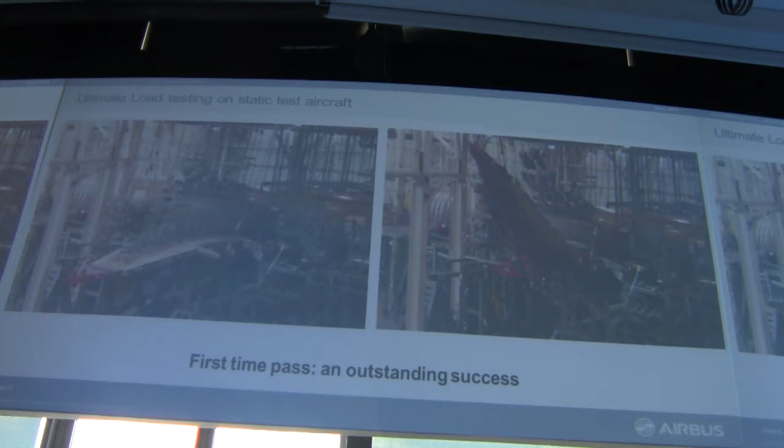We set ourselves the target of demonstrating 1.25 limit loads at the time. We then continued on a very successful trend until the end of last year, when we finally passed the ultimate load test with ease. You can see here the impressive results and deflection that we had on the wing.

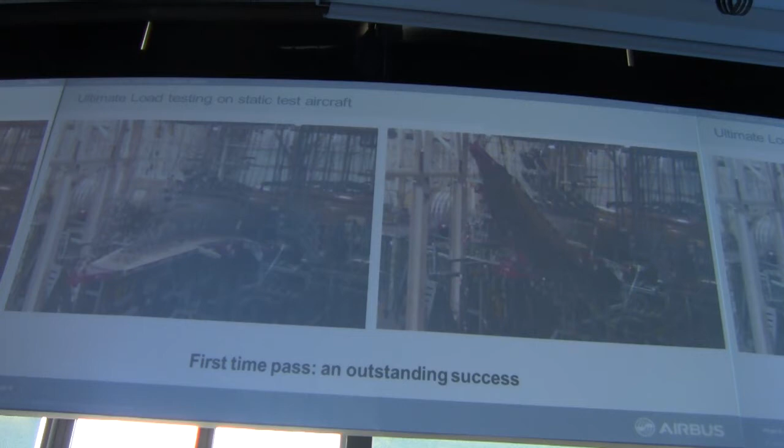That was a very important achievement, because for sure this did a lot to achieve the maturity of the design from a structural point of view. There is another very important stream of actions to certify and qualify the structure for operations.

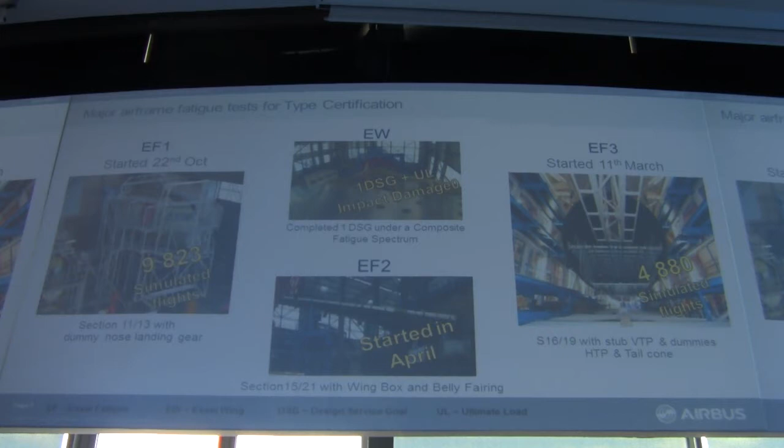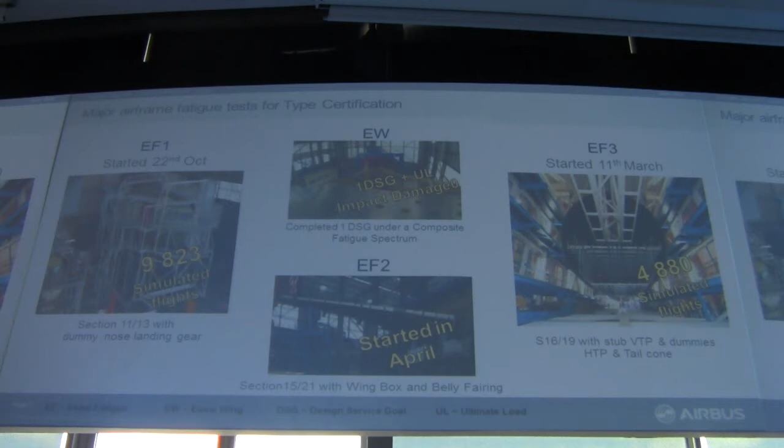That's the fatigue test campaign. We are well into this fatigue test campaign already. We have four specimens participating in it.

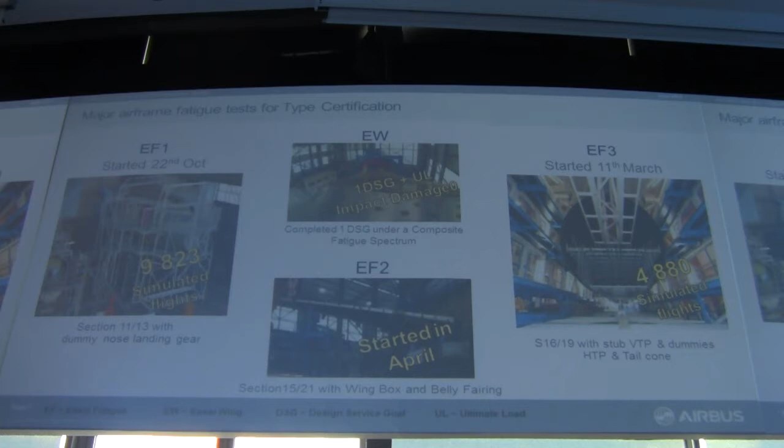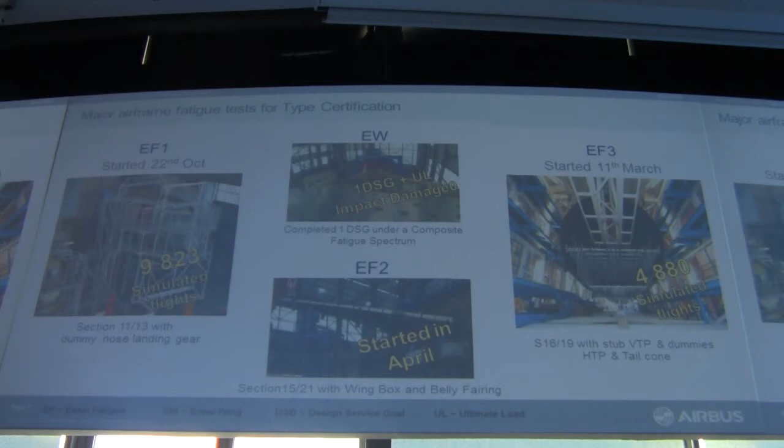In fact, we have cut the aircraft into three parts: the front, the aft, and the center fuselage, including the wings, plus an additional wing, which is on its own but there to recognize that this aircraft is made of composite. The wing has composite and metallic parts, and the two need to be exposed to different testing cycles, which is why we cut this campaign for the center fuselage in two—one to qualify the wing first under a composite fatigue spectrum just for the composite itself.

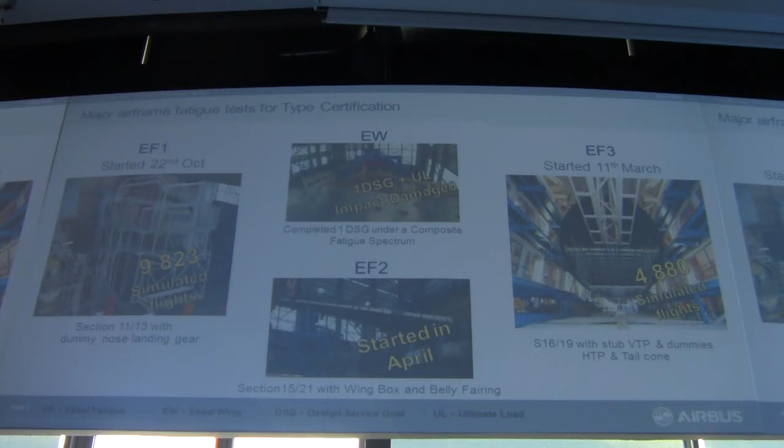And when it was done to a certain extent, and we had demonstrated that we could go to one design service goal and then pass the ultimate load testing of the wing itself, we could start the campaign we call EF2, which is center of fuselage plus wing, this time with a different type of fatigue cycles, which will clear the way towards several design service goals.

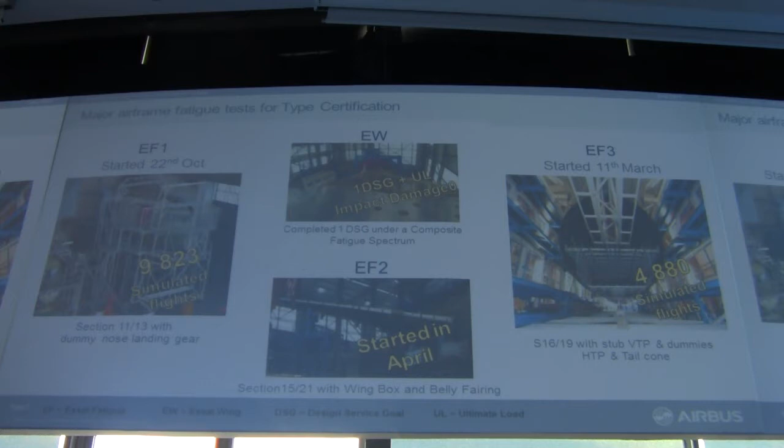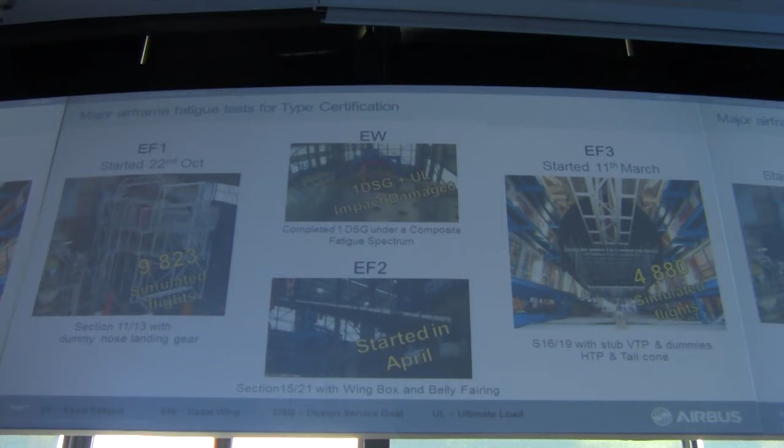So now, in terms of achieving the minimum required for certification, we have already passed this milestone for EF1 and EF3 - the front and back end of the aircraft. Now we are finishing the center of fuselage the same journey, and in the coming weeks we will have achieved enough evidence to start operations. Nevertheless, this testing will continue in 2015 and perhaps even into 2016. It's a long journey where we will expose this structure to many cycles representing several design service goals. So that's on the structure side, and so far so good, I would say.

Now, flight test itself - 5 aircraft will be flying soon, and certainly MSN5 will be the most visible one in the last phase of the test campaign. I said 1900 hours projection, and what we need for certification is around 2,500 to 2,600. We'll see the precise numbers, but with a fleet of 5 aircraft, we will have no real difficulty accumulating the flight hours and tests we need for certification. And actually, certification is not just aircraft flying; it's also the results of tests and a lot of certification documents that we need to deliver.

To our authorities, and we need their blessing before we can get to the type certificate. So this is going quite well; we have a clear path to a certified aircraft, and certainly we expect that we will deliver our share of the work before the end of the summer, and then it will be the final discussions with EASA and FAA, following closely what they are doing, requesting, and approving. So that's the plan.

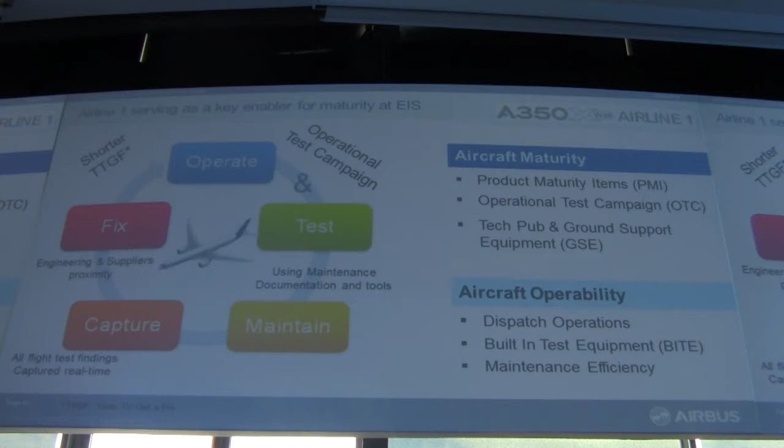So this is the setup. The concept is simple: operate and test the aircraft like if we were, as much as possible, doing still flight tests, but as much as possible in an operational environment. Use the maintenance systems and the support systems that our customers would have. Capture the findings as soon as possible and fix the issues as quickly as possible, trying to reduce as much as we can the time to get the fixes. So that's two aspects: aircraft maturity, how to accelerate it, and how do we feel about operability when time comes. What is our view? What do we need to anticipate with the customer? How do we need to prepare him for this journey?

So that's in a bit more detail for aircraft maturity. Since the beginning of the program, we were chasing all the findings from other programs, from our environment, particularly for Airbus aircraft, trying to find what was relevant to us, what we needed to do with the design or with the testing to demonstrate that the issues other programs had would not be likely to happen in the A350.

So that has been in place from the beginning, but now it's about the product maturity items that come directly from flight test. Most of them we will have time to fix before delivery, and perhaps some we won't have time to fix, so it might turn into small limitations in some areas. So we need to prepare ourselves and our support to the first customer to be successfully operating this aircraft. This is based on the product, but it's also touching the support system, the technical documentation, the ground support equipment, and the way the aircraft will be tested with those means, either built into the aircraft or external means.

And this is why we have these operational test campaigns, which really train ourselves to test the aircraft like operational airlines would do, using the tools and improving those tools as we use them.

We can see that in our plants they are working on the aircraft depending on the level of completion and the level of the component that the plants are making. We are at around 38 in early stages, around 18 in the pre-final assembly line, and around 10 already in the final assembly line. We are going slowly but surely up to this curve, which is going to take us to rate 10, four years from now.

Today we are at around rate 2 in the start of the final assembly line, meaning every 2 weeks we have a new set of major components entering. We are heading towards the beginning of next year, a rate close to rate 3 in the fall.

This journey is followed by regular reviews that control the maturity of the product and the risk of accelerating the pace, because behind this industrial achievement there is also a more and more significant investment and inventories building up. So we have to be able to deliver and continue accelerating.

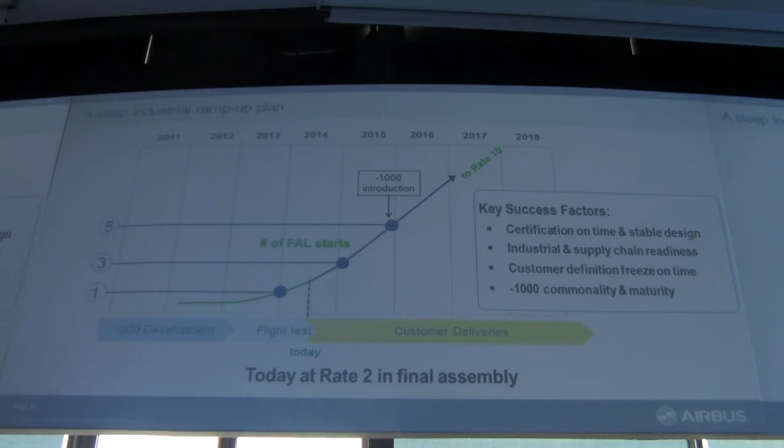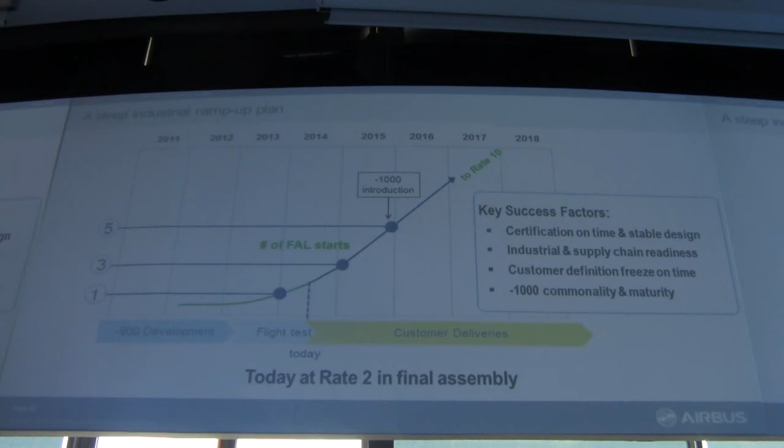The key success factors, which we've discussed several times, are the same: stability of the design, and certification on time, because the later we get certification, the more work in progress we would have in the fall and beyond. Certainly the second driver, our industrial supply chain readiness, is one of the most important factors, along with our ability to define the head of version our customers will request.

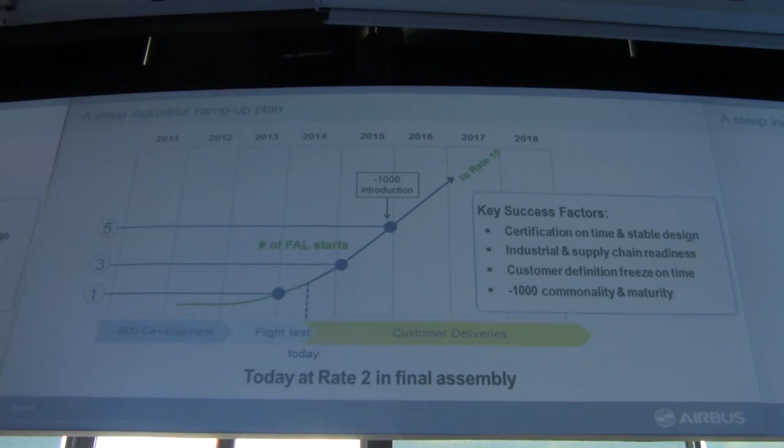When we have the Dash 1000 entering the final assembly line at the end of next year, this will use, in most plants, the same factories, sometimes dedicated tools, sometimes the same tools. So it's an additional challenge ahead of us that we are taking seriously.

In terms of design, I think the flight test program has demonstrated that the new technologies we embarked on in the A350 design are all there with a sufficient level of maturity. We had no issue with the electrical distribution system. The CFRP skin of the aircraft is performing well, including during a lot of icing and lightning strike tests. Our new load alleviation function makes our design quite stable. We didn't have a major new loop of loads and stress activity during the flight test program, which is quite new and unusual.

Finally, the lithium-ion battery, which will equip the 350 after EIS. Today we are qualifying two solutions: one is the NiCad battery, using the 380 battery at the start of operation at EIS, and later on we will move to a lithium-ion battery, which is already used in the development and test aircraft. From a technology point of view, we have mastered this in a satisfactory way, and we have no high risk coming out of the flight test or other test programs.

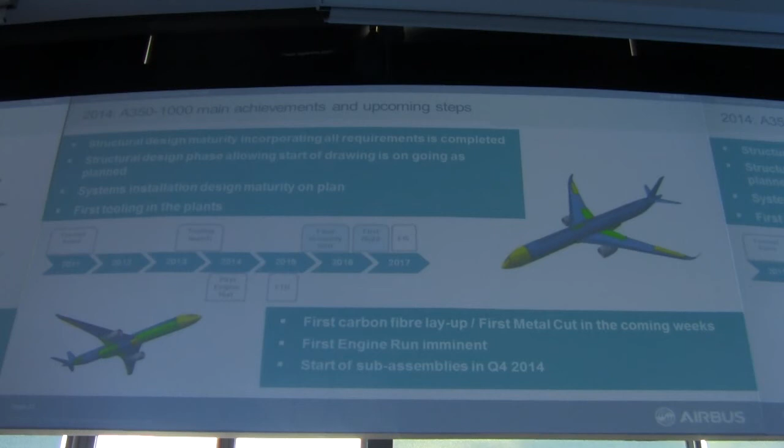At the end of last year, we went through our normal process to review the maturity of the design and give the blessing to launch the industrial tooling, the big tooling required to make the big specific parts of the Dash 1000, because even when parts are almost common, they have to be resized. If I take the wing, for instance, we have to resize the wing covers to the loads of the Dash 1000. So this is not revolution, it's evolution, but it requires, in the world of composites, big tools with long lead items and long cycles that needed to be launched on time to be able to produce on time.

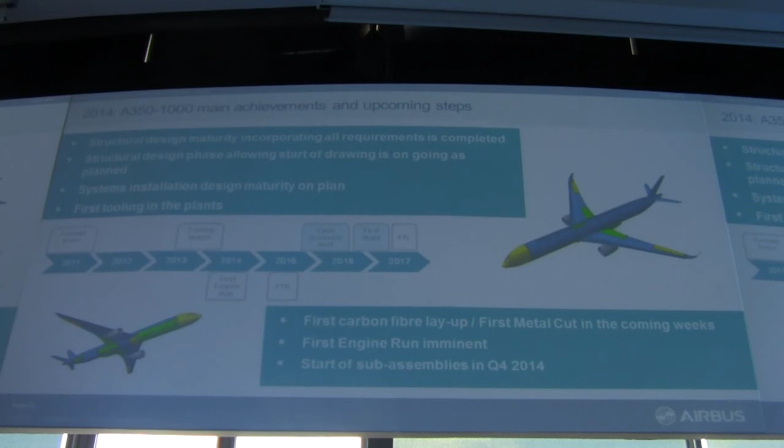Actually, this is what's going to happen during the summer — the longest lead items will start producing during the summer. We start cutting metal and laying up carbon fiber in Nantes, for instance.

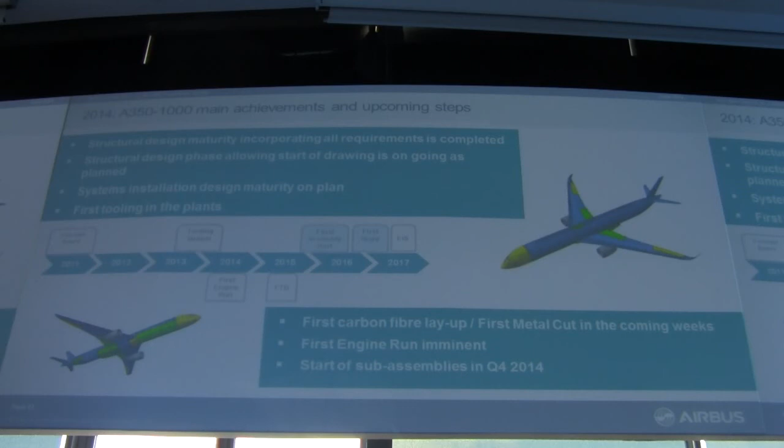And on the engine side, Rolls-Royce is following a similar roadmap, and they are now preparing the first engine to test. We will start testing it during the summer normally.

So that's all taking shape, and at the end of this year we will already be in the assembly of the major component items in our component assembly plants, then moving forward at the middle of next year we will be in Saint-Nazaire and Hamburg preparing for first delivery at the end of next year. So that's the plan, that's the roadmap. Still, of course, a lot to do.

Nothing's granted, nothing's given, but we have all the lessons and all the experience. Just mentioning a couple of examples where the Dash 900 helps a lot, making the Dash 1000 a much lower risk aircraft compared to what the 900 was at the time.

If I take the flight test data, we have the flight test data, so we can have a smaller flight test instrumentation in the Dash 1000, and this will enable us to gain time in the flight test process. We have all the results of the structure, so we're able to size the Dash 1000 with not just predictions but also results of testing, and some incorporation of new technology has been made to gain efficiency again for the Dash 1000.

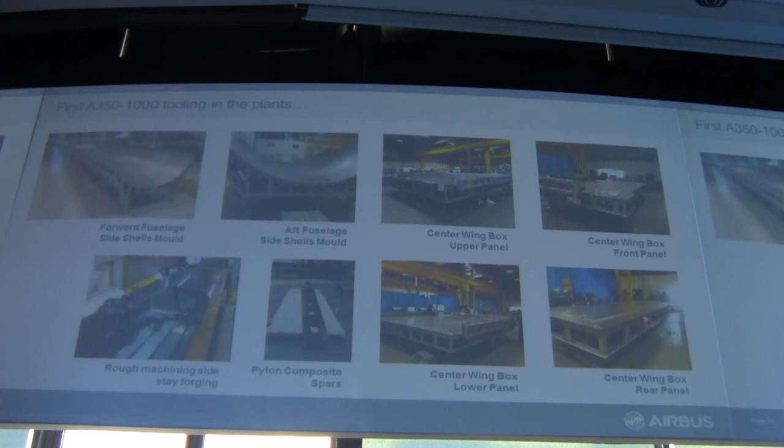So this is experience and also new technology applications, taking the composite technology one little step beyond the 900. These are just examples of tooling that are already there and that will make these big parts.

To prepare for the testing phase, we also need to shorten the testing phase compared to the 900. This will be achieved by using much more simulation. The 900 was a breakthrough in terms of testing strategy, going to much more functional testing and much earlier testing, shared differently with our systems suppliers.

After the 900 experience, then we have the Dash 1000, and here the next step is going to replace some of the testing by simulation. We are not going to rebuild a completely new Iron Bird. We will proceed by simulation and by delta.

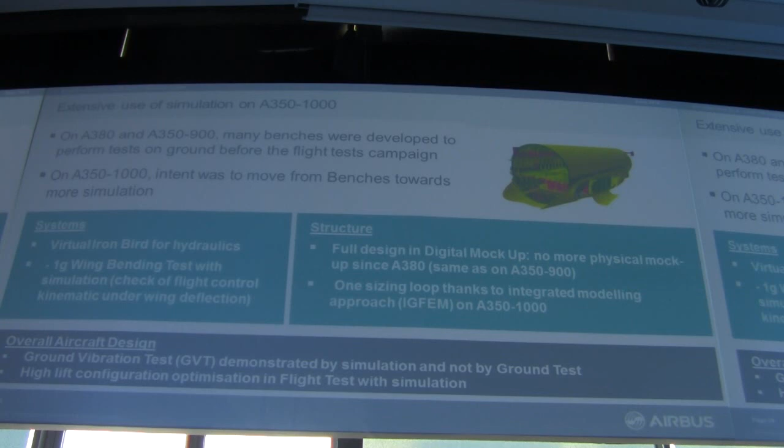Compared to the 900, we will not replicate the -1g wing bending test, where you need to bend the wing on the -1g load to demonstrate that all the systems and all the movables work without interaction. We are confident that we can do that by simulation, because we will have a perfect calibration of our deflection tools.

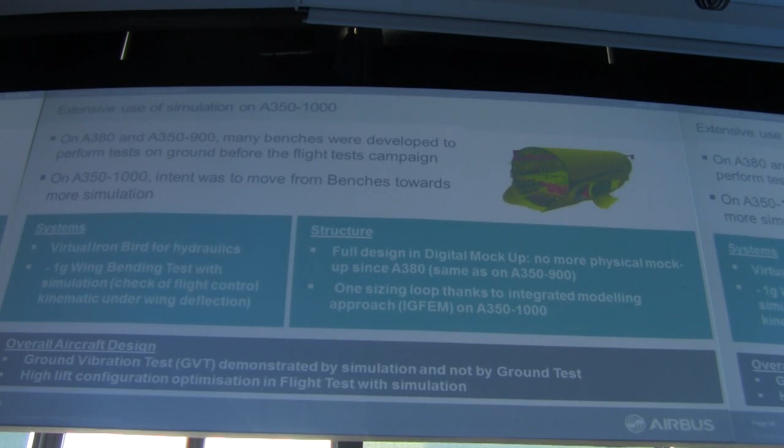That are able to work out the deflection of the wings and the movables under certain conditions. We have, of course, other gains in terms of efficiency in the system installation world. For instance, the way we install the systems is very similar to the 900, so we go much faster than it was the case on the 900, replacing interface point one by one creation by porting of packages of interface points on a given zone from the 900 to the Dash 1000. That just gives you an example, and there would be even more to say on this topic.

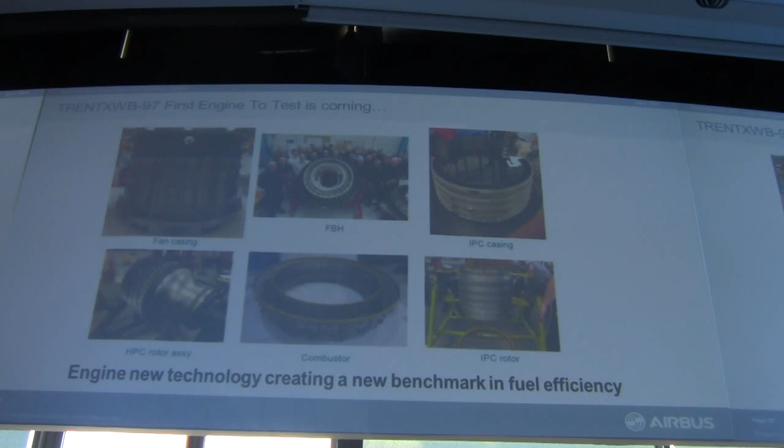Rolls-Royce is also using a lot of new technology in the 97K engine that is required for the Dash 1000. For instance, they are using 3D printing with titanium parts to accelerate the manufacturing of some of the parts. So all this is new, with reasonable steps forward that will just give us the next level of efficiency, and also will enable us to reduce lead time.

The engine itself, the lead time for development is similar to the 900 but shorter. For instance, between the first engine to test and the flight test under an A380 flying test bed, we will replicate that process because it was very successful on the 900, and it gave us at the start of the A350-900 flight test program a very mature engine. We will replicate the same process and have, in the middle of 2015, the A380 carrying this 97K engine before we fly it on a real A350.

So that's in a few words about the Dash 1000, and this brings me to a wrap up. For certification, we need to cross our fingers, but we feel confident. Every year, every day is important, and every day brings its contribution, but we have no showstopper today.

We have, nevertheless, still a very busy flight test period during the summer. The flight test team, who already did a huge and great job since one year, has another hot summer in front of them. Then, of course, this is for the final assembly line team, completing these two first customer aircraft and bringing them as close as possible to the delivery and to the customer, and this requires a very high quality standard.